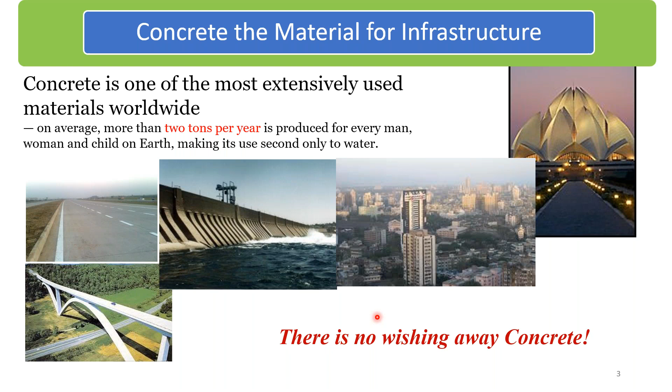But for the one year where, because of COVID, there was a negative spike, you see that we are actually increasing, and on an average we are hoping to hit about 6 to 7% growth, and a good year probably 8 to 9% growth. Now that is not going to happen unless we modernize and expand our infrastructure.

Infrastructure in the form of roads, bridges and transportation, housing needs have increased. The estimate we have in India is that we need to be spending about $1.2 trillion by 2030 to meet the projected demands in the cities, projected demand of infrastructure. This is required for us to sustain our growth.

Now, the growth contribution from productivity will be higher than in previous periods, and that is the other thing. That is, if India seriously wants to be a $5 trillion economy, we have to start creating physical infrastructure, and we have already started that.

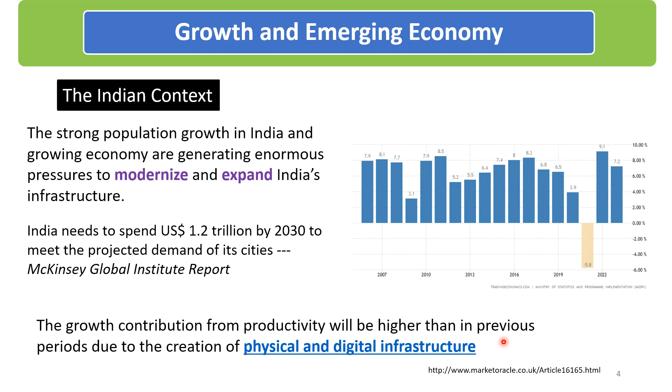There's significant investments being made in our transportation infrastructure, housing, because as we urbanize, there's a heavy demand for housing. And so all of this requires a lot of concrete. And the problem with concrete is this cement.

So if you look at it, cement, a clinker, makes up about 10% by mass of concrete. So basically you start off with clinker, that is the basic material that we use for making cement. And by the time you come to concrete, its percentage is diluted to about 10%.

So that is how much clinker goes into concrete. But if you look at the carbon footprint of this concrete, the clinker makes up about 90% of the carbon footprint of concrete. And carbon is the one word that has become a dirty word. Now we need to handle this.

And the main topic of my talk has been going towards net zero. What we imply by that is we want to become carbon neutral by 2050. It's a target that's been set for us, and we have to start moving in that direction. And the problem here is with this clinker - that is one of the major contributors for carbon in concrete construction.

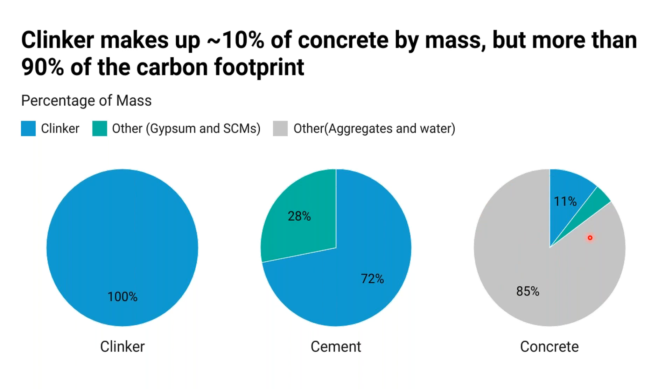Now here, of course, there are two players in this particular market. You have the cement producers who are looking at it primarily from the cement perspective, but then ultimately it ends up being used in concrete. So I think we really need to look at net zero from a concrete perspective, a material perspective of concrete, where clinker is the major contributing factor. So that is what we have to look at.

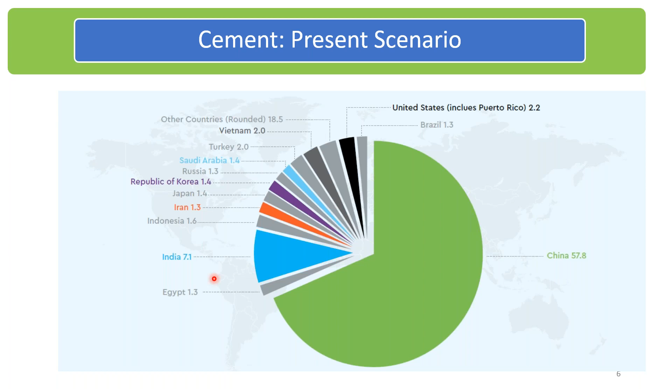And what is the cement scenario? What is it that we are currently looking at? If you look at the cement production in the world today, China, of course, leads by far everybody else. It produces more cement than everybody else put together. But India is the second largest producer of cement, and all of our cement production is captive. Whatever we produce, we consume - there's nothing left for any export.

And the demand for cement, if you look at it past, present, and future, this is where we stand. Now, China's demand is peaking, and we expect that the demand in China is going to go down, but India's demand is only going to increase. The projected demand of cement in India is estimated to be around 750 million tons per annum by the time we hit around 2050 and a little beyond that.

So there is a humongous requirement of cement, a very large requirement of cement, projected requirement of cement, and this is required primarily for the concrete that we need for putting in all the planned infrastructure that we have in mind.

Now, if you look at cement itself, it has a low embodied energy - amongst the lowest of all materials. If you compare it with steel, glass, aluminum, the embodied energy is very low. But the issue is carbon, where cement per ton or per gram has a very large carbon footprint. Combine this with the very large volume requirement, and we are looking at a very large carbon footprint associated with cement. This is the worrisome aspect which we are dealing with.

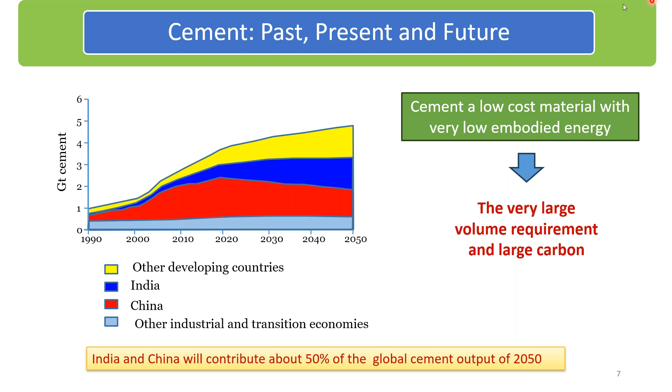And this is where we have to work on, trying to chip away at the problem, trying to solve it. So now, where are the challenges in cement production? It's not like we can continue to make cement indefinitely. If our projected demand is going to be 750 million tons, for producing cement we need limestone. And the current reserves of good grade limestone that we need to make cement are estimated to last around 35 to 40 years.

We don't have an accurate fix on this, but we estimate limestone reserves will last 35 to 40 years. Cement companies will tell you otherwise, but this is one of the major limitations. So there is a resource limitation that is looming. If we want to make the cement that goes into infrastructure, we have to look at this resource limitation as well.

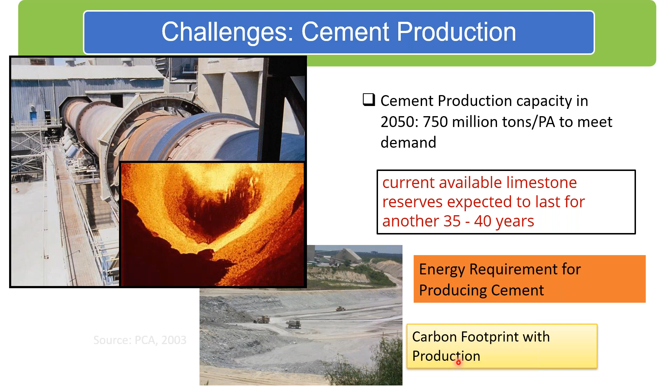There's also an energy requirement for producing cement. Cement is an energy intensive material. Compared to other materials, the energy footprint of cement is much smaller, but it still requires a lot of energy. And this is the major worrisome factor: the carbon footprint associated with cement production. This is what we are currently trying to tackle, and trying to bring down.

If you look at the production of clinker, the primary carbon tag associated with concrete, 90% of it comes from clinker or cement. If you look at cement production itself, most of the carbon comes from two sources. One is the process itself: I have to decompose limestone.

My basic chemistry is limestone chemistry. We basically take limestone, we heat it, and it gives off carbon dioxide. So this is inherent in the process of making cement. Carbon dioxide is going to come out no matter what, because I heat limestone and that gives off carbon dioxide.

There's also another part of the carbon tag associated with cement production that has to do with thermal emissions, basically the heat required to break down this limestone, and heat required for the clinkering process. So that also has some carbon tag.

Now, I can tackle the thermal emissions part, because when we're looking at net zero, we've learned to dissociate the carbon produced during the manufacturing process from the carbon associated with energy, because I can meet my energy demands from renewable sources. So I can make this entire half green, but I still get stuck with this because of the process itself. So one of the fundamental issues with cement production is this.

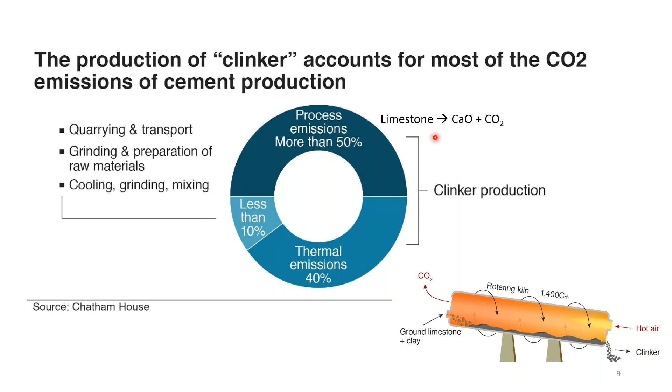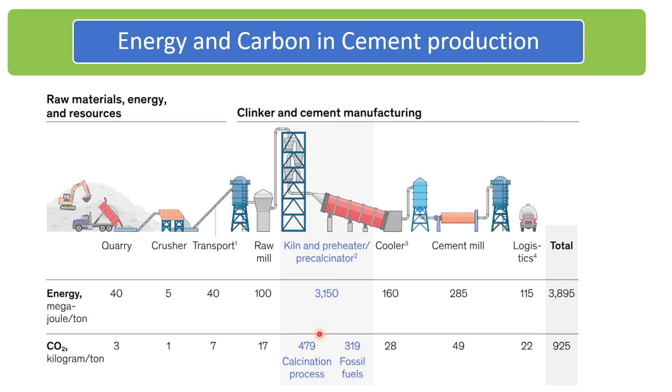It starts off with limestone, and I have to decompose it, and there, in the process itself, there's a carbon tag associated with it. This slide shows the different processes involved in the production of cement. If you look at the energy consumed and the carbon dioxide produced, most of it goes into the calcination and the clinkering part of it. These are the steps we are currently focusing on, trying to see what can be done in order to reduce the carbon footprint associated with cement.

And the reason it's 8% is because of the sheer volume of this material that is consumed. The concern comes from the fact that sooner or later, a polluter has to pay. It's a matter of time before carbon taxes or some kind of punitive measures are introduced for large carbon emitters. At that point, that will directly impact concrete production, because the cost of producing cement will increase, either directly because of taxation or punitive measures, or indirectly where we'll have to offset the carbon with greener sources, and that essentially costs money.

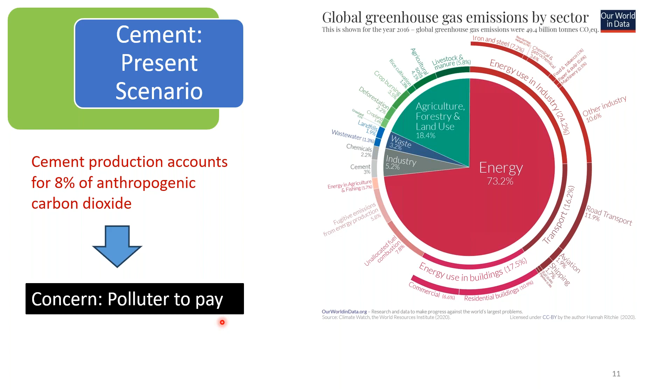So this is going to net impact the cost of our infrastructure production. And this becomes even more pertinent for India, because we are sitting on the cusp of our development, where we have to continue producing infrastructure. Most other countries have already produced their infrastructure; now they do not have a demand for it. Our demand for infrastructure is only starting, and it's only going to grow, which means that for us, it becomes an impending problem. We have to seriously start looking at how to make our cement more carbon friendly.

So the different measures could basically vary from as simple as efficiency in design and construction - I'll talk about this a little bit - to efficiency in concrete production, and savings in cement and the binder. So in terms of how much clinker we can save, savings in clinker production, and then finally carbon capture, utilization, and storage. This is something that also has to be done, because I'll show you later that with all these other measures we can only achieve so much.

At the end of the day, if I'm going to use clinker-based cement in producing concrete, I cannot completely eliminate the carbon dioxide that's coming from limestone decomposition. I can reduce my clinker factor in my cement, I can make my concrete construction very efficient so I use very little concrete, but still I have to use some clinker, and the clinker will have some carbon. Therefore, this carbon capture, utilization, and storage is seriously being thought of as a major contributor in the future, to the extent of 36% of the total contribution towards net zero will likely come from this.

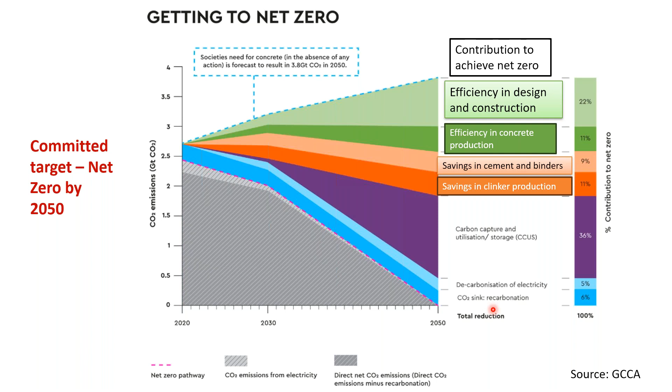Then the other thing we are looking at is producing long-lasting structures. If I have structures that last a long time, there's a lesser need for replacement, and therefore I have a more sustainable process, which allows me to use the structures over the long term without the requirement of replacement. But then, of course, I have to pay particular attention to durability, and also talk about performance-based design.

So our current design procedures really have to be revamped - I'll present about this in the next few slides. Efficient construction is a must, because we have to reduce labor-intensive processes, make the whole process efficient, and we are looking at, perhaps from pre-construction, very efficient structures with minimal use of material.

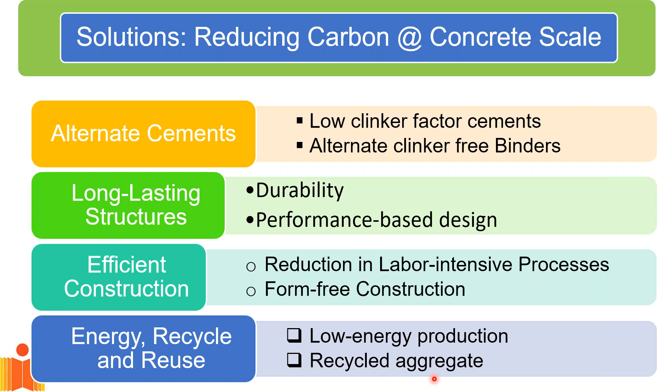And energy recycle and reuse is going to become pretty standard. So we are looking at low energy in the production of cement, concrete, and of course, bringing in recycled materials - recycled aggregate concrete is already finding its way into making of concrete.

So now, where do we stand with cement and making reductions in cement production? Of course, I'm talking about carbon. The Indian cement industry, I think, has already come a long way. Today, cement plants in India are run at a very high level of efficiency. We probably have some of the most efficiently run cement plants.

Today, the cement industry has reduced CO2 emission levels by about 36%. There's been a significant reduction achieved, to the point that today we're talking about 665 kilograms of carbon dioxide per ton of cement. This previous number used to be much higher, at 950 kilograms of carbon dioxide per ton of cement, which has decreased to 665 kilograms per ton. This is through process efficiency in cement production, bringing in renewable sources of energy, and a slew of other measures that have brought that number down significantly.

The other thing we are doing is starting to produce a lot of cements with reduced clinker content. We are the only country in the world currently marketing and using cements like PPC and PSC. I'll talk about these in significantly higher detail in the next few slides. Today in India, we're consuming more blended cements than anywhere else in the world, to the point that 73% of our cement consumed is primarily blended cement.

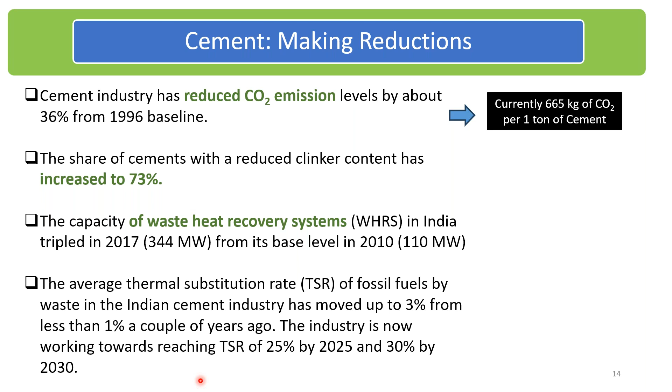Then you put it to use in either sequestering it, binding it somewhere, or storing it somewhere. This is where a lot of technology is being developed, where we are looking at extracting this carbon dioxide from the flue gas and concentrating it, providing a solid or gaseous concentrated carbon dioxide. There are different technologies at play here - chemical absorption method, direct separation, oxy-fuel, calcium looping. These are all at different TRL levels, or technology readiness levels. Some of these are probably going to come to fruition soon, where we'll have this technology available to capture carbon and increase its concentration from the flue gas.

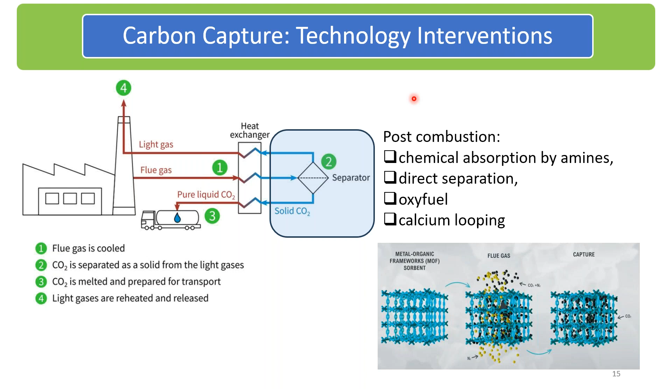Then comes the sequestration - what do you do with the carbon that has been captured and is in concentrate form? One solution being thought about is sequestration, and one place to sequester it is in old discarded oil wells, simply piping it down the wells. The oil wells themselves have porous rock which used to contain oil, now depleted because oil has been extracted. So we take this concentrated carbon dioxide, which could be in gaseous or liquid form, pump it down the well, and when that well gets saturated, just plug it. This is what is being thought of in terms of sequestration.

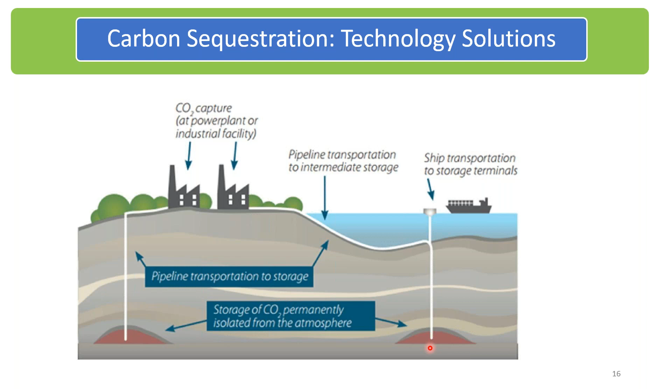Now here we're talking about optimization of mix design, quality control, going towards high performance and durable concrete structures. This is one part of going towards net zero. The whole point is this also brings in sustainability, because then I have a structure that is more sustainable, durable, and is going to last over a longer time.

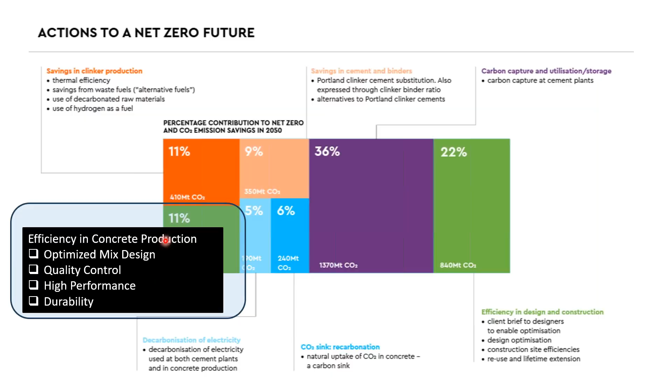So if we look at this now, I'll briefly talk about this. With this, we cannot go with our conventional method of design, and this is concrete mix design and even concrete structural design. The conventional methods of design are prescriptive, and most of these are strength-based, where we look at concrete material strength or structural member capacities.

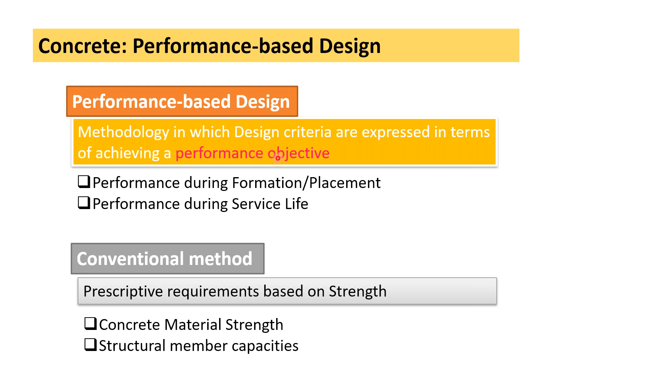Now, if I really want to implement something that ensures durability of structures and long-term performance, then I have to bring in a performance objective, and here I have to talk in terms of performance-based design. Performance during formation and placement is also becoming very important, and performance during service life. These have to become essential criteria in determining concrete that goes into a structure.

I'll give you an example of high performance concrete specification. If you look at the concrete that was placed in One World Trade Center, specifications were put in place. The cement usage in concrete was specified to be less than 236 kilograms per cubic meter of concrete. This was for concrete expected to achieve compressive strengths of about 90 megapascal in the first 40 floors, and a compressive strength in the range of 65 megapascal for the higher floors.

So the expectation was that these high strengths could be delivered using a very small amount of cement. Of course, this would only be possible if you look at mix design very carefully, optimize the use of cement, and start looking at other cementitious materials which have a lower carbon footprint.

Now, there were also performance requirements put in place. The concrete mixture produced had to have the ability to be pumped for at least 15 floors if it's a 95 megapascal mix, and if it's an 80 megapascal mix, it should be pumpable for 40 floors. This is a performance requirement that is specified. The maximum heat of hydration was specified at 70 degrees Celsius.

Now, there are other performance requirements in terms of measured performance in a specific test, like the RCPT, rapid chloride penetration test. So these are all specified.

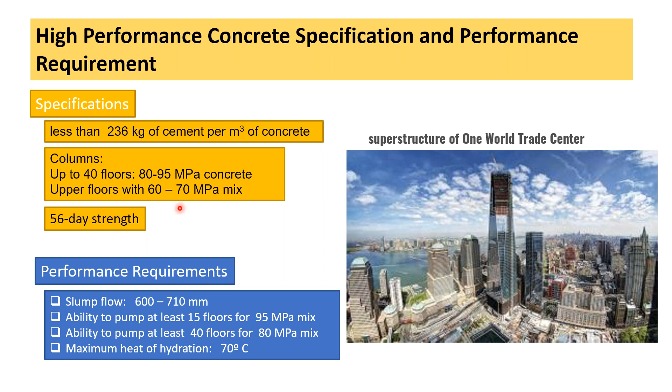Now, where is this different from a prescriptive measure? Well, strength in this case is something that is anyway expected, but there are other performance requirements that are now stipulated. What the material supplier does is not of consequence, but he or she has to meet the desired performance in the finished product. This, I think, is the direction we'll all be moving. A lot of codes are already moving, and I think our IS 456 is also headed in the same direction, where we will have performance-based requirements, where we expect concrete to perform in a given environment, and that would automatically ensure durability and assured long-term performance.

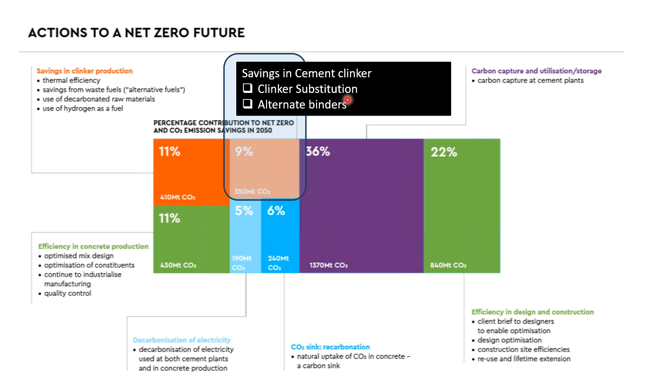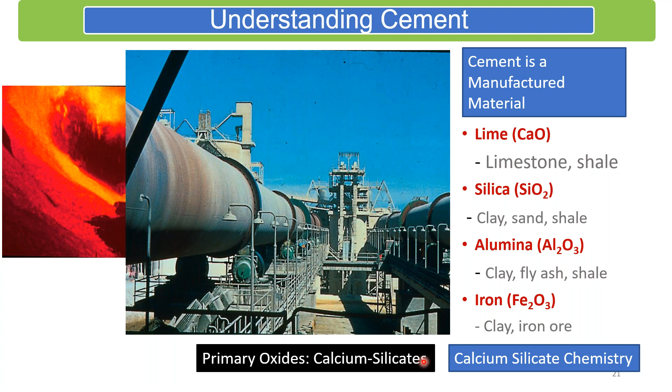Now, coming to the other small chip in the whole game is to save on the cement clinker. We can look at clinker substitution and alternate binders. To look at this, we need to understand cement a little bit. Cement is a manufactured material, and the primary ingredients we have in cement are calcium silicate. So it's calcium silicate chemistry that we are looking at when it comes to cement.

Now, the way we typically look at cement is, if I look at the primary ingredients of cement, the tri and dicalcium silicates react with water through a hydration reaction, and what I get is calcium silicate hydrate, and a lot of lime is produced. Initially, it's probably 5 or 6 decades old now, we discovered that if I add a source of silica in the form of fly ash and slag, then I can produce additional CSH. So the initial attempts were to add them as additives, and we found we were getting enhanced strength because the silica was consuming lime and giving us additional CSH.

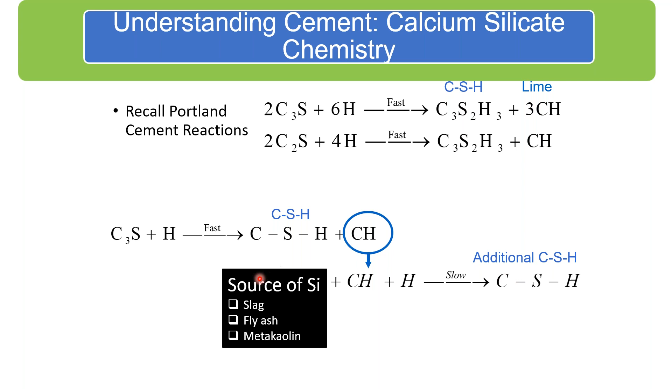Soon we discovered that I could use these as cement replacement instead of addition. And of course, then one has to get the math correct so that I can balance out the additional CSH against whatever it is that I'm losing with the reduction in C3S.

And that has given rise to the production of these blended cements. So if you look at OPC, this is typically clinker 95% and gypsum about 5%. Today, we are producing blended cements in the form of PPC, where I have clinker and fly ash to the tune of 30%, and gypsum 5%. So basically, my clinker factor is already decreased.

Now, I can decrease my clinker factor even more if I go to PSC, the slag cements. Here the story completely reverses, where I can go up to 70% slag and only 30% clinker. So here I'm talking about a very low clinker factor cement, which will definitely have a net positive impact on my total carbon contribution coming from the cement.

Now, if you look at the blended cements, this is the story as it has evolved over the years. And today you see that more than 70% of the cement that we're making is in the blended form, whether it is PPC or PSC. The problem is that with slag, we don't have adequate slag to start making more of PSC. Otherwise, we could really bring down the clinker factor in cements.

If you look at the greenhouse gas emission, starting with OPC at the 0.77 median value, by the time I come to fly ash I've dropped down to 0.52, and for blast furnace slag I drop it down to about 0.28. So there's significant reduction in the greenhouse gas, the carbon that is associated with the cement.

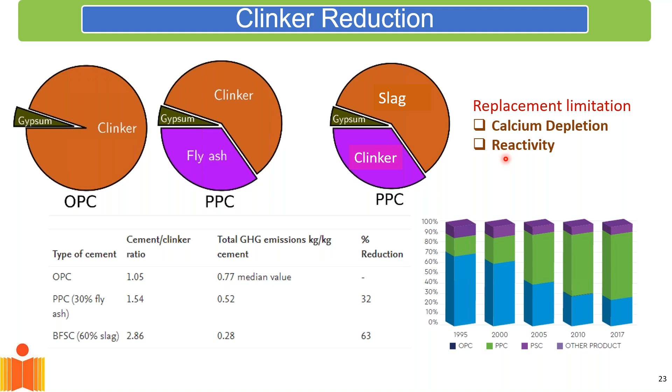Now, of course, the issues here are, and I'll show this a little later, the calcium depletion. I cannot indefinitely keep adding slag or fly ash into the cement, because I'll deplete the calcium in the system. And also a big uncertainty in these two materials, fly ash and slag - they're not manufactured materials, they're waste materials. I cannot control their composition, and therefore the reactivity of these materials oftentimes dictates how much of this material can replace cement.

So just a quick look at cement replacement with fly ash. Fly ash itself is produced when we burn coal. In the India-specific scenario, we are still installing mega thermal power plants that burn coal. So for the foreseeable future, next 10, 15 years, there is going to be adequate fly ash available in India. This is based on projections from Coal India, which is producing the coal, and NTPC, which is still continuing to commission new thermal power plants.

Now, in the thermal power plant, when I burn coal, what is left behind is ash, and the ash that I collect from the stack, the flue gas, is this fly ash - it's a grayish looking material. And the issue is, because coal varies significantly from source to source, and even from the same source batch to batch, we get a very large variation in fly ash properties.

Now, the fly ash itself could be self-cementing, that is, if it's hydraulic, I can simply add water to it and it starts setting and gaining strength. If I have a high percentage of calcium, that is a class C fly ash. But my bigger problems are it is very variable in composition and it has typically low reactivity. So when I replace cement with it, I have to expect the overall reactivity of the system to go down.

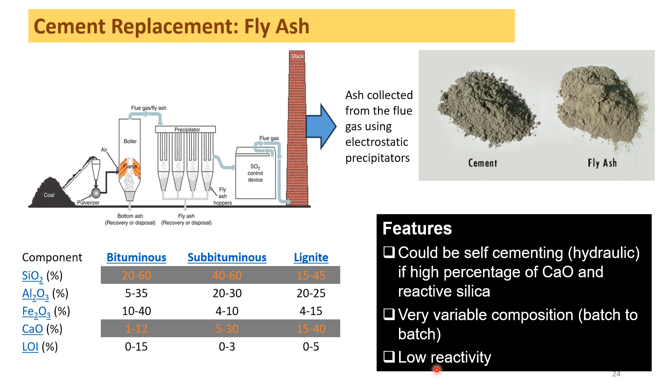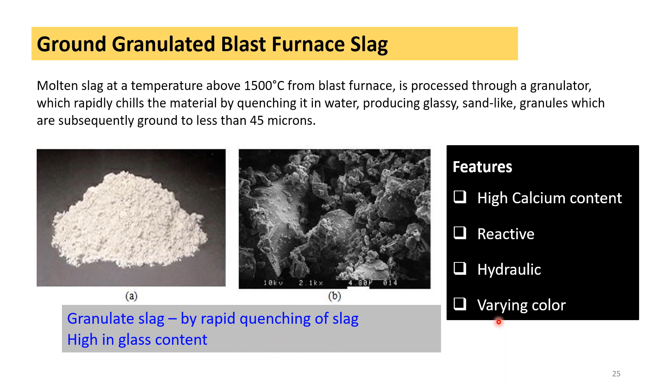The only issue here is it is varying in color, which makes the use of blast furnace slag in cement a little tricky because of the different colors associated with it. So the challenges we currently have with larger use of fly ash and slag in concrete are large variability in composition - source to source, and within source, batch to batch. Typically these are low to medium reactivity materials, and they rely on the secondary effect, not the primary reaction - utilizing the lime produced by cement hydration to produce CSH.

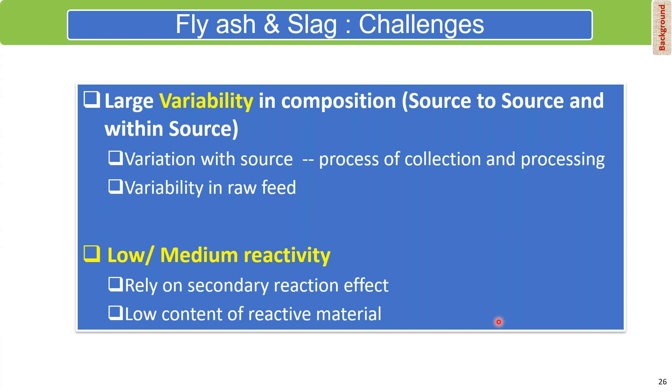So I'll quickly talk about fly ash as cement replacement. In the India-specific scenario, I believe this is one of the key things we need to look at, because for us, fly ash is something that is available in abundance, at least for the foreseeable future.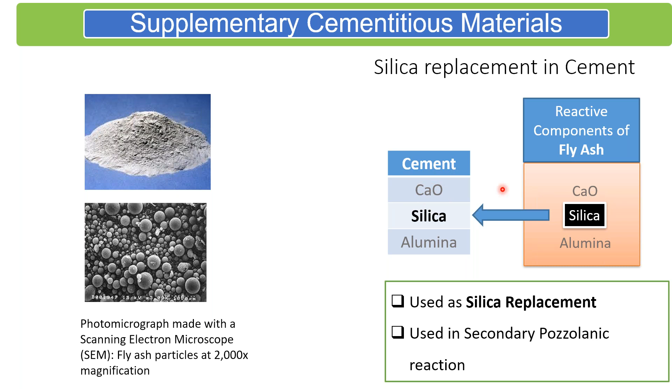The whole point here is that when we look at fly ash, it has lime in low quantity, but primarily it has silica and alumina. Cement also has lime, but in abundance, along with silica and alumina. So when I replace cement with fly ash, essentially what I'm doing is a silica replacement—replacing the silica coming from cement with the silica coming from fly ash. But in the process, I deplete the lime, because cement is lime rich, whereas fly ash has very low quantity of lime.

Now, what about our coal consumption and ash production? If you look at these countries marked in red, these are currently producing the largest amount of fly ash—China is number one, we are number two. In the foreseeable future, at least the next 10 to 15 years, fly ash is going to be available. So we have this waste material that can be used in cement as a value add, thereby reducing our carbon tag.

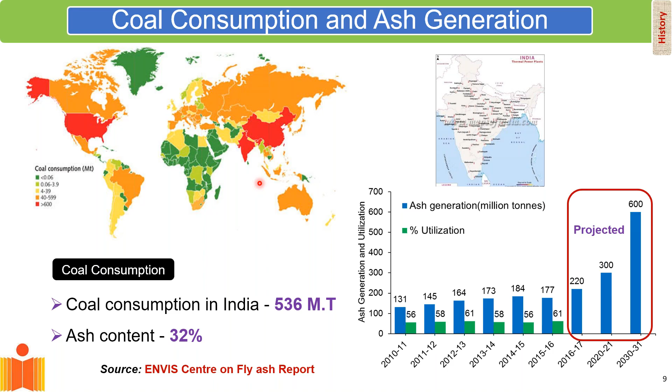Now, a little information about the use of fly ash, particularly relevant because the production of fly ash in India is not regulated. Outside of India, if you use fly ash, it has to be classified—whoever produces or sells it must disclose the composition, and physical and chemical properties should be made known. In India, whoever produces fly ash is under no obligation to disclose its composition, so you basically buy it as is, where is, simply picking it up from the thermal power plant.

Now, the way fly ash is produced: we have this ash-laden flue gas, a very hot gas at about 450 degrees Celsius. As it exits from the stack, it is collected through electrostatic precipitators, into different bins, from bin 1, 2, all the way to 8. As the bin number increases, the fineness increases—more fine the fly ash, more reactive it is. Previously in India, we were using fly ash from bins 2 and 3 in construction, but today, after realizing it's a value-added product, bin 2 and 3 fly ash is slowly being replaced with bin 1, which is coarser and of lower reactivity.

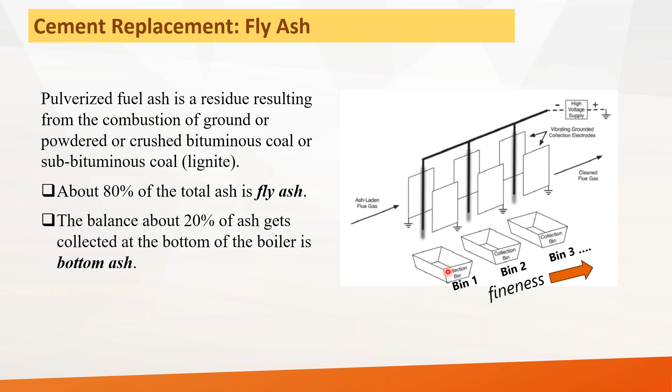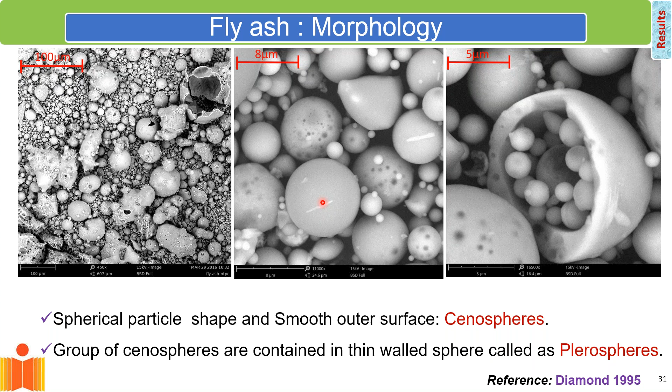So just to show you what fly ash looks like under the microscope, it consists of spherical particles called cenospheres, and these spheres are primarily glass. The reactive content of fly ash is contained in these glass spheres, so it's the glassy content of fly ash within the cenospheres that we're interested in.

I want to show you the variability typically found in fly ash. We collected fly ash from different power plants around the country and did a typical oxide analysis. The primary oxides—silica and alumina—are more or less similar within a small range of variation across sources. But if you use these fly ashes in cement, the results are night and day, with very large variation in compressive strength. That means the oxide composition numbers alone aren't telling us much. We also notice that in most Indian fly ashes, the lime content is very low. So coming back to the substitution: if I use fly ash in cement, I bring in silica, but that's also questionable—something isn't quite correct about this picture.

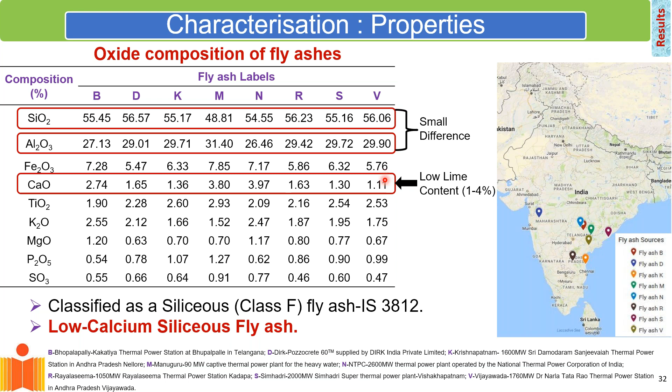But cement is lime rich and this is lime deficient, so basically I'll be reducing the lime content in the system. We developed procedures for determining the reactive silica present in the fly ash. Reactive silica is the silica present in those glassy spheres I just showed you.

If you look at these fly ashes that we collected, the blue bars here represent the total silica, and you can see it's a healthy number, around 55% of the total fly ash. But if you look at the silica present in the glassy spheres, it's a much smaller number, less than half of what is indicated by the total silica.

When we did a little more analysis, we found the difference is because silica is also present in the form of quartz, and quartz is nothing but sand. A lot of our fly ash tends to be loaded with sand, and when we are buying or using fly ash, we're actually paying for the silica shown in the blue bar, but we're only getting what's in the green bar as the actionable material. This is something we really need to be concerned about.

Also, if you look at the reactive silica content, there's a large variation, and this contributes to the very large variation we see in strength and other properties when we use fly ash. This tells us that we have fly ashes with higher reactive silica, like fly ash B, and fly ashes with very low silica content, like 13%.

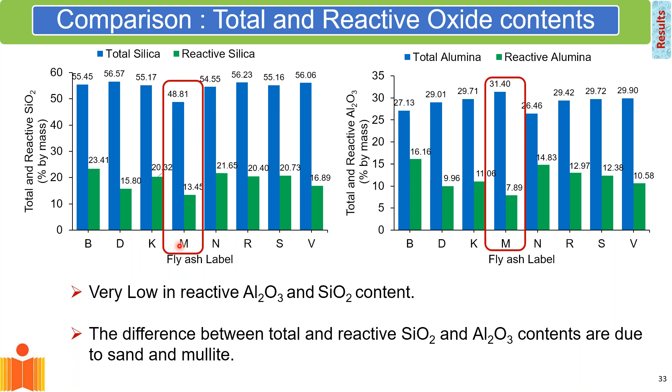If I simply do a 30% swap of cement with fly ash, I'll get very different results. Not surprisingly, with this particular fly ash the strengths were double of what we got with fly ash M. So clearly we need to look at these things more objectively to efficiently use the material without compromising performance, rather than going with a prescriptive measure of replacing 30% of clinker or cement with fly ash.

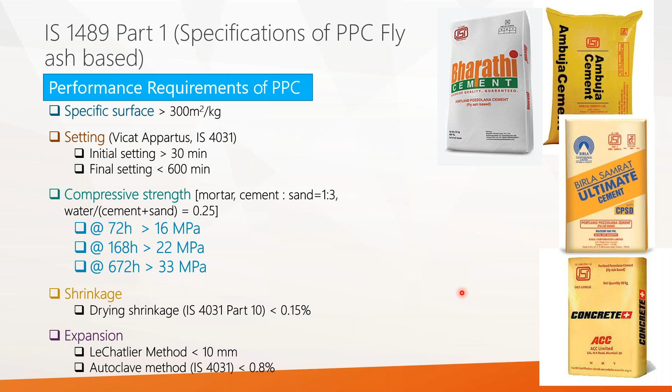Now, in India today we are making a lot of PPC. Almost 70% of our cement consumption is primarily in the form of PPC, and different companies are already making it. But if you look at the Indian code for PPC, the requirements are primarily that of the 33 grade of cement—that's what is currently prescribed and expected from a PPC. That's partly because the grade of cement is based on 28-day strength, and since fly ash is a slower reacting material, its higher ultimate strength is achieved at a much later time.

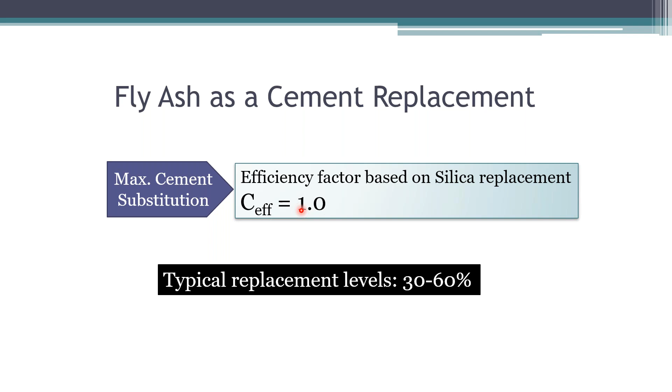So what we developed is a rational way of replacing cement with fly ash, using what is called an efficiency factor. This comes from thermodynamics—you can actually calculate this. The whole point is that if I hit an efficiency factor of 1, I achieve the same performance as with pure clinker-based cement, even on substituting cement with fly ash. Going by this efficiency factor, I can replace up to 60% of clinker with fly ash and still achieve the same performance.

To illustrate this, we looked at a 20% replacement, which is typically what is done with fly ash. Here is the cement composition: alumina, silica, and calcium. The cement has a very high calcium content—71% of cement is basically calcium oxide. These are the reactive components of fly ash, and you can see it's completely calcium depleted, only about 2%, but it has a high reactive silica content. So when I replace cement with fly ash, I can increase the silica content in my binary blend.

At 20% replacement, we found it gives us an efficiency factor of 1.34. We developed an M35 mix which gave a compressive strength of 47 megapascals using normal OPC 53 grade cement. But with a 20% replacement, because of the 1.34 efficiency factor, we started getting much higher strength of 63 megapascals. Of course, we had to wait much longer because fly ash is a lower reacting material, so I can't expect this at 28 days. So one thing we have to consider, if we're looking at clinker substitution, is also relaxing the requirement of 28-day strength.

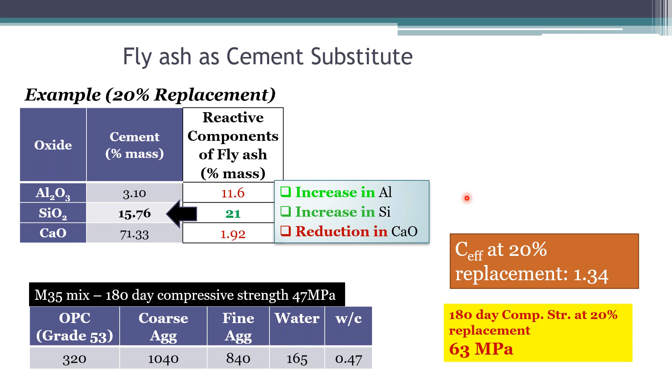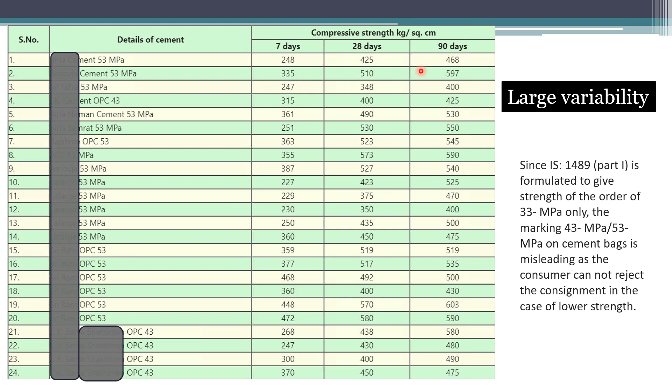I just wanted to show you something about this test data for different cements. Most of them are OPC 53 grade, some PPC grade cements. And what we find is a very large variability. Some of them don't even meet the requirements of the standard, but they are available in the market. A lot of the PPCs in particular show a very large variability, and most of them don't meet this 28-day strength requirement. But by the time you come to 90 days, most of them do meet the strength requirement.

So I would like to now quickly talk about fly ash and its uses in products and applications. It's not just that I reduce the clinker factor, so a gain in carbon, but I can use it as a cement substitute to improve overall performance. I'm looking at improvements in strength by optimizing the use of cement in terms of efficiency factor, but I can also improve the durability and rheology of cement. I just want to show you a few examples.

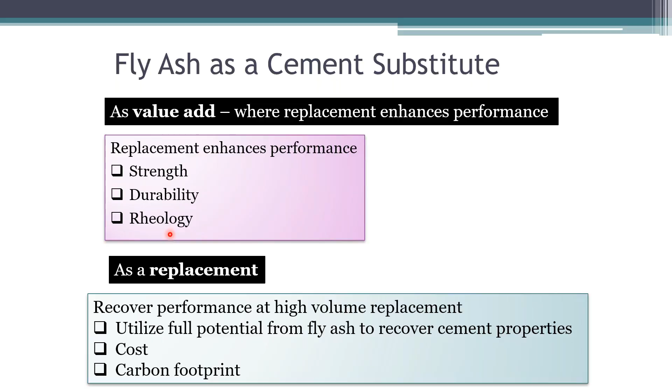So, controlling heat in mass concreting. Oftentimes I need material that is lower reacting, and here fly ash would be very beneficial in reducing the heat and therefore thermal cracking in concrete.

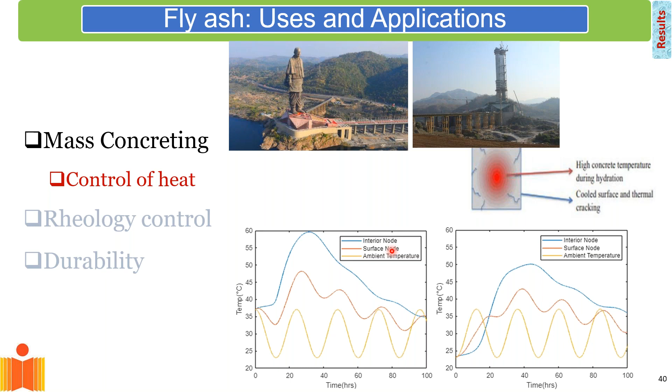Improvements in rheology: when I use fly ash in concrete, I produce a more pumpable concrete. It's because of those glass spheres that are present that act like ball bearings and improve the overall flow of concrete - in roller compacted concrete for pavements, SCC, and in concrete printing applications. Addition of fly ash actually gives some cohesiveness to the mix, helps with the packing, and overall helps in reduction of the water demand of concrete.

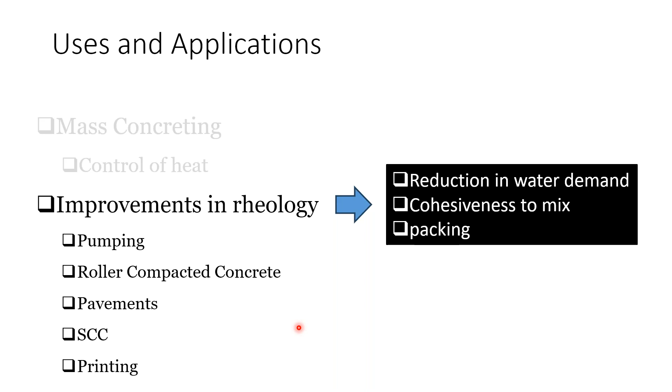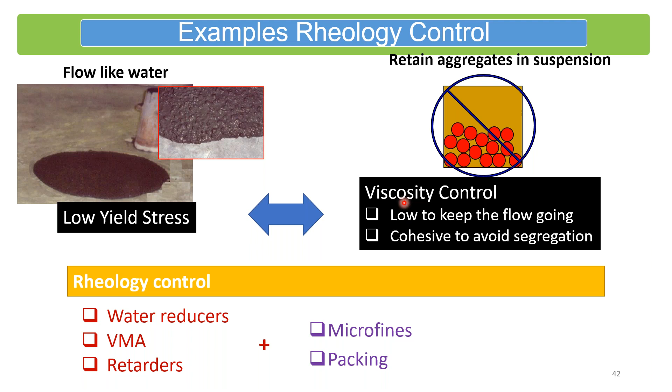So some examples of rheology control with fly ash: if I am to make SCC, self-compacting concrete, I need some mechanism to thicken my paste. Otherwise the aggregate will not hold in suspension - they'll separate out. To get that viscosity control, to increase the stickiness of the paste, oftentimes fly ash is almost essential in producing a mix of SCC.

High performance concrete, where I need the other end of the flow control, where I'm talking about slip forming of pavements - here again a concrete mix absolutely requires fly ash because it helps with the packing that I need, and it gives the mix that cohesiveness.

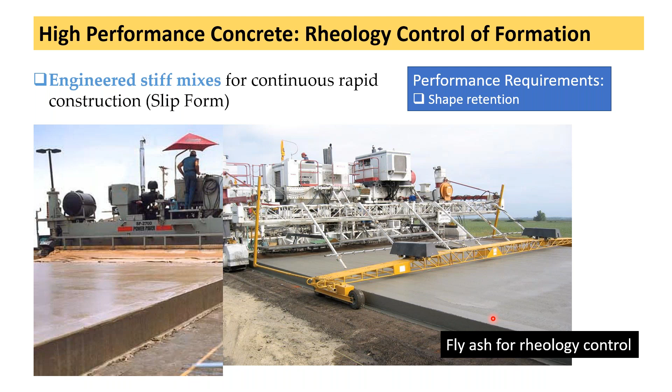Another place where fly ash is an absolute must in controlling the flow is in the use of precast concreting, particularly where you have these hollow core slabs that are being produced. The hollow core slabs are typically produced in an extrusion type mechanism. After the slab is extruded, these holes are supposed to keep their shape - the material should not collapse on itself and close the hole. So that again requires fly ash.

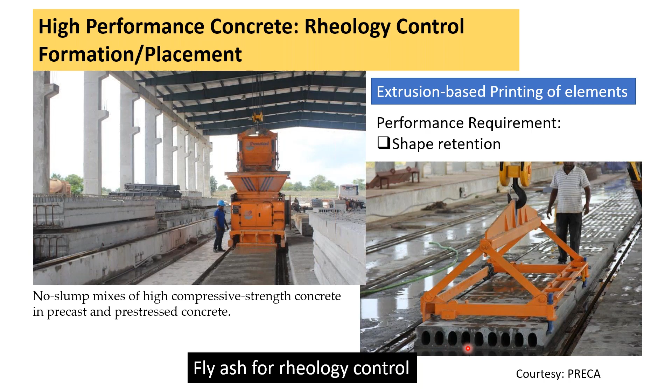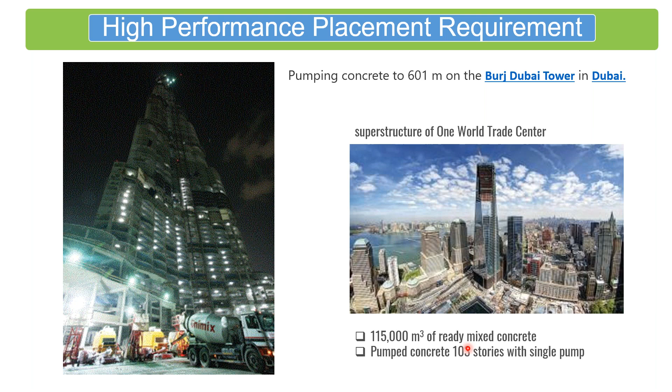The other places where fly ash has been used quite considerably to provide a pumping solution is in the construction of, of course, One World Trade Center, where fly ash was used to get some control in pumping, and also in Burj Khalifa, where concrete is pumped to a height of 601 meters.

Now the other aspect of fly ash is help in durability. If you add fly ash in concrete, you can reduce shrinkage, so that means less chance of shrinkage cracking. If I can cut down on shrinkage cracking, then I have a more durable piece of concrete, because water cannot enter into concrete, and my steel is protected for a longer time. This also plays out in terms of RCPT, the penetration - it basically cuts down on chloride penetration into concrete.

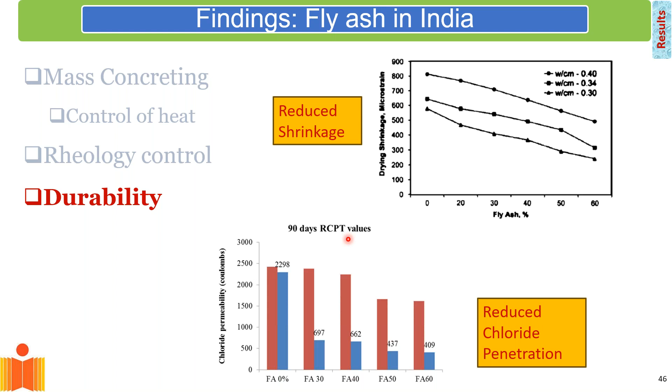So basically, I'm looking at the use of fly ash from reduction in clinker factor, so that's a plus, and also scoring points on the durability part, which is also required for me to have long-lasting sustainable structures.

Coming quickly to slag, which is the other material that is talked about as cement replacement - in slag we have different reactivity, and just like fly ash, the reactivity of slag varies considerably. In ASTM we don't have this in the BIS standard; grades are specified, they go from 80, 100 to 120, depending upon the reactivity of the slag.

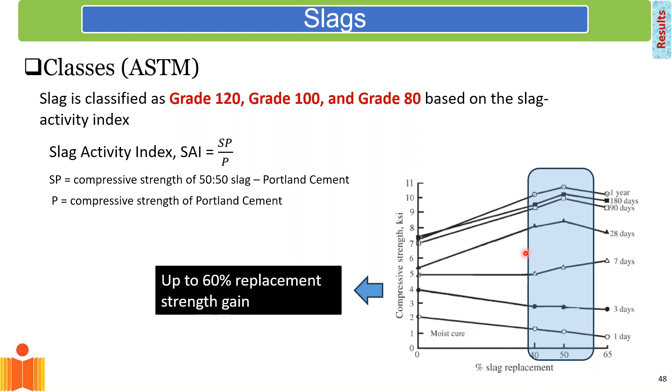We get the activity index in terms of the compressive strength of a 50-50 slag Portland blend compared to ordinary Portland cement blend. Up to 60% replacement of slag, we're able to regain the strength and also produce an improvement in long-term strength compared to OPC. So with slag, we can replace cement or clinker by almost 70%.

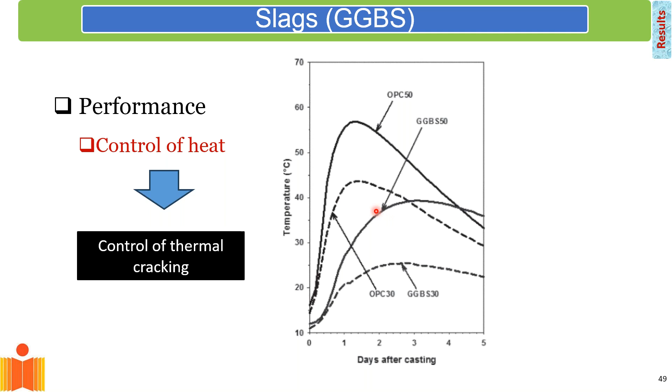The use of slag helps because it's not as fast reacting as cement, so it can be used to control heat production in structures. This is the heat produced by OPC, and this is the heat produced when I start adding blast furnace slag, which plays a role in controlling thermal cracking. This is where slag is perhaps most beneficial: achieving diffusion control, because slag added to concrete has a tremendous chloride binding capacity.

If you look at these tests of chloride penetration from the chloride ponding test, this is the chloride profile in control, normal concrete. Once I add blast furnace slag, the profile is limited only to the surface layer. And of course, fly ash also cuts this down.

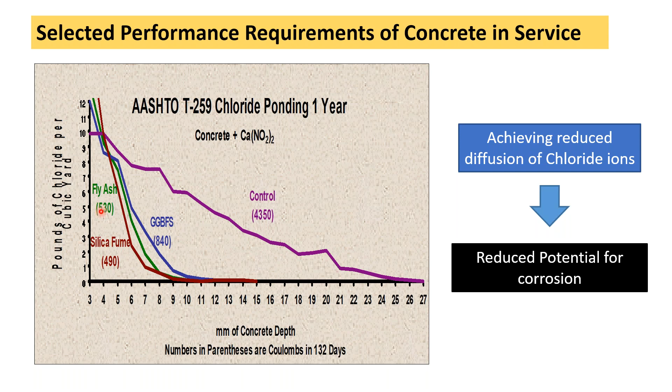So these supplementary cementitious materials are helping on several fronts: improving durability in the form of shrinkage, heat, and also chloride penetration.

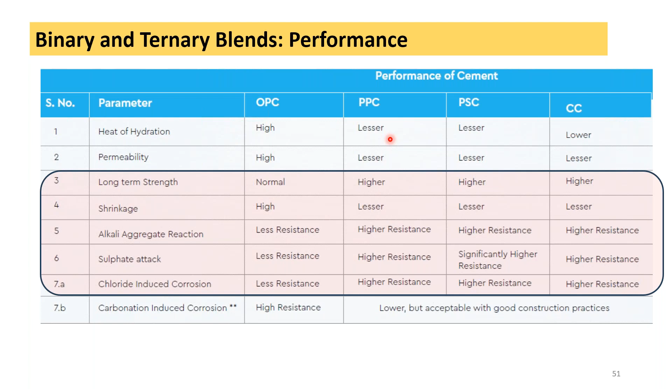The only thing one needs to look at carefully is carbonation-induced corrosion, where it has been reported that PPC and PSC have a higher risk of carbonation-induced corrosion.

Now what about using blends of slag and fly ash, where I can benefit from both? Slag gives a slightly higher reactivity, slightly better chloride binding capacity, and better strength performance. Fly ash helps with rheology and long-term strength.

So I can start combining these, and this is already in play. We have ternary blends that have been successfully used. The Reliant Stadium in Houston, Texas used a ternary blend of slag and Class C fly ash, targeting 124 megapascal strength. In Canada, slag and silica fume, bringing in an additional material, has conventionally been used for 80 megapascal concrete. Japan has been using slag cements for about 70 megapascal concrete strengths routinely.

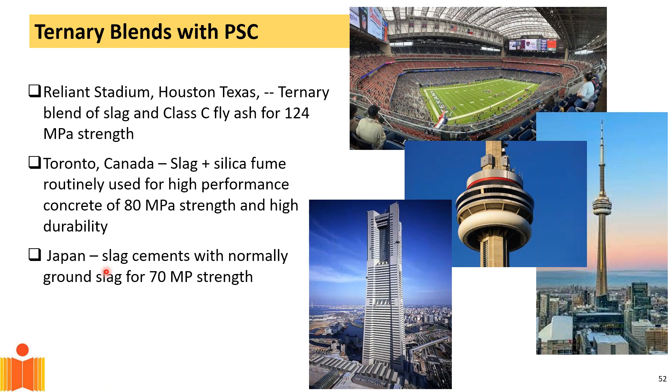Now, for high performance concrete in service, one of the biggest hitches is that traditionally we use 28-day strength as our benchmark. This becomes a problem when using lower reactive supplementary cementitious materials as clinker substitutes. Also, with structures like a high-rise building, achieving fast strength isn't really required, because even with a 7-day slab cycle, the columns on lower floors won't see loading until much later than a few months. So the requirement for 28-day strength is misplaced.

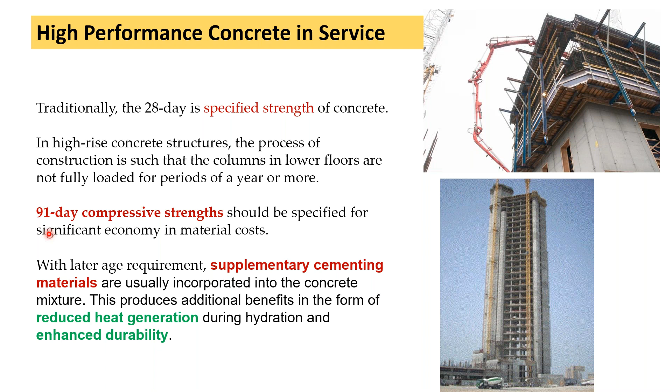Perhaps a 91-day compressive strength may be a better indicator of strength as applicable for use with supplementary cementitious materials. This is one of those things we have to look at more carefully if we are going to promote the use of more blended cements.

Now, we've looked at ternary and binary blends, looking at clinker substitution with fly ash. There are other cements being produced too. One is LC3 cement, where we bring in calcined clay and limestone as a substitute for clinker, achieving about 50% clinker substitution with calcined clay. The calcined clay itself doesn't have to be very high grade, so potentially there are savings here with this material.

Now, the other way of looking at materials is to look at alternate cement chemistry, which does not start with limestone.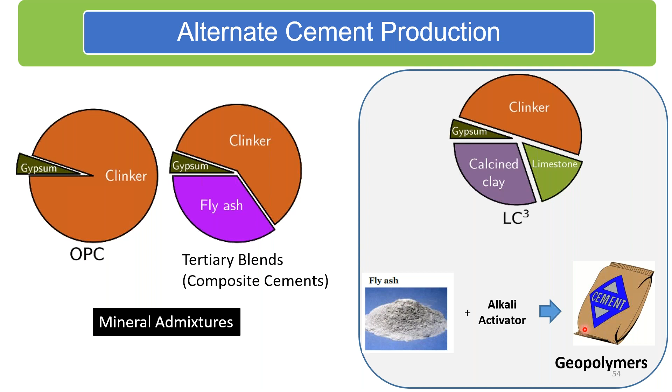And here we have this whole group of cement binders that we call alkali activated binders, where you start with a waste material which is a source of silica or alumina, such as fly ash, activated using alkalis, and then we are able to produce cements. One class of cements is called geopolymers.

The other cements are typically called alkali activated slag based cements. The whole point here is to get a source of silica or alumina. Currently, the cheaply available sources of silica and alumina are fly ash and slag, and we basically activate it using alkalis. One can optimize the activator ratio, and we can start making these cements, which are derived completely from waste, getting away from limestone.

So basically, the carbon tag of this material is very, very small. This is also a concurrent, parallel development that is taking place, which perhaps may see a larger role in the future.

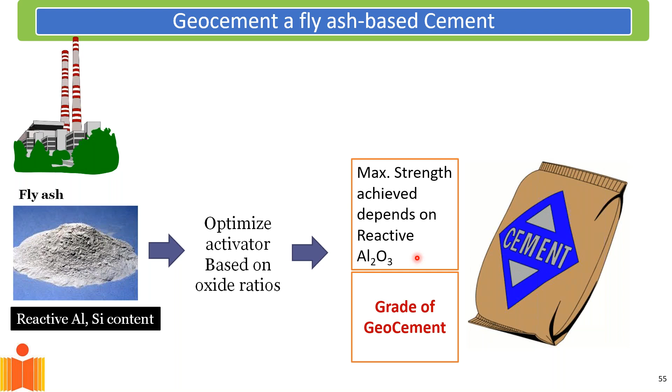Now, coming to so far we've looked at the material aspects. I quickly want to conclude by talking about the last piece in the puzzle, which is efficiency in design and construction. We've looked at the material aspects, we've also looked at carbon sequestration. So coming now to the fact that suppose I'm still using limestone-based cements, clinkers, then we have to look at 22% reductions in the total carbon by efficient design and construction.

So here we're talking about design optimization. That is, we bring in concepts of optimization and basically use material efficiently, produce structures with lower use of material that give me the same level of structural performance.

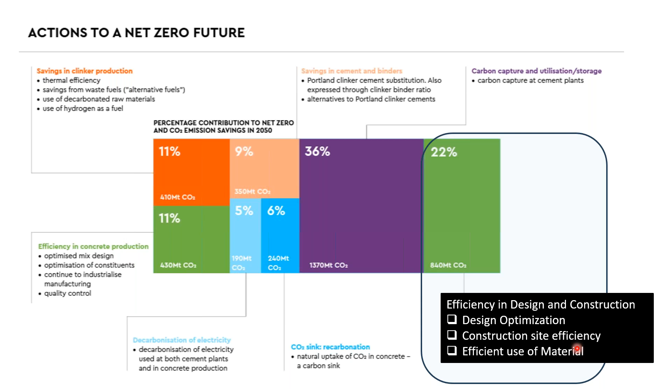Then, of course, construction site efficiencies. We really have to improve this. That means adopting technology on the construction site. So efficient construction is essential, and we have to look at current forms of construction, because we are currently limited to a large extent by forming on site. That means bringing in more precast materials that are formed off site in an efficient manner.

One of the current limitations we have is the use of rectilinear forms—I currently make all my beams rectangular because they're easy to make. Now, a rectangular beam is not the most efficient structure. We really need to look at our structural forms carefully and optimize the use of material, which, if it comes to practical application, is not possible with the conventional method of construction. So we need to start looking at alternate methods, such as form-free construction.

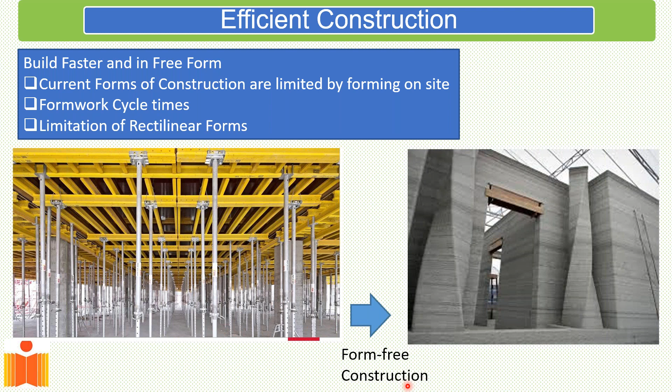This is where techniques like 3D concrete printing are coming into the fore. If you look at 3D concrete printing, it has caught everybody's fancy. We're looking at something like a robot that's going around constructing a structure, and of course, it's all digital construction and all things fancy.

But perhaps what people are missing in the glitzy appeal of 3D concrete printing is the avenue it offers for lean construction. This is perhaps what a lot of us are more excited about than the other things. That is, I can start printing structures following the simple principle of material follows force—I can deposit material where it is required, not be forced by the limitation of the formwork.

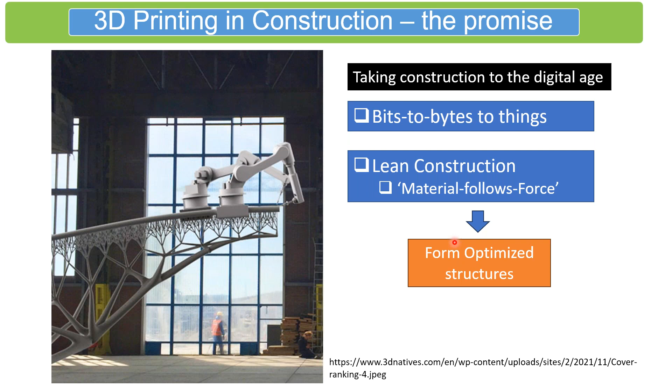I don't have to produce rectangular beams. I can look at the force flow inside the structure and deposit material when and where it is required. I can produce form-optimized structures that are light and give the same structural performance with much lesser use of material—lighter structures which are very efficient. So therefore, I cut down on the requirement of concrete.

And this, in terms of weight, is about roughly 1/5 or 1/6 of the weight of the solid beam. So I have achieved tremendous material savings without compromising the capacity or the performance.

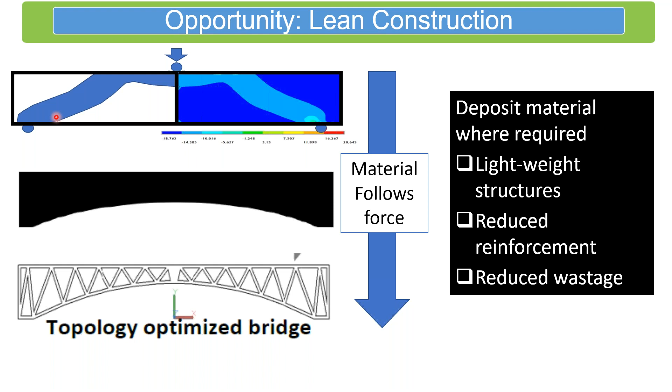Now, of course, there are a few challenges with 3D printing. One of the biggest challenges is incorporation of reinforcement into 3D concrete printing. But work is happening very rapidly, a lot of research is happening, and even that will become reality very soon. So with that, I'd like to conclude my presentation.

I know I've covered a large scope of things, starting from materials to structures. But the whole idea is that we all have to move towards net zero. It's a mandate now. We have to look at achieving net zero. There are several opportunities, and of course, there are multiple challenges in this.

The only way we'll hit net zero is by looking at concrete as a material and the carbon that goes into the production of the material, tackle the material related issue, and also look at the use of this concrete in structures, to use efficient structures with less usage of materials. So this is the message I was trying to drive. And with this, I'd like to conclude and open the floor for any questions or comments.